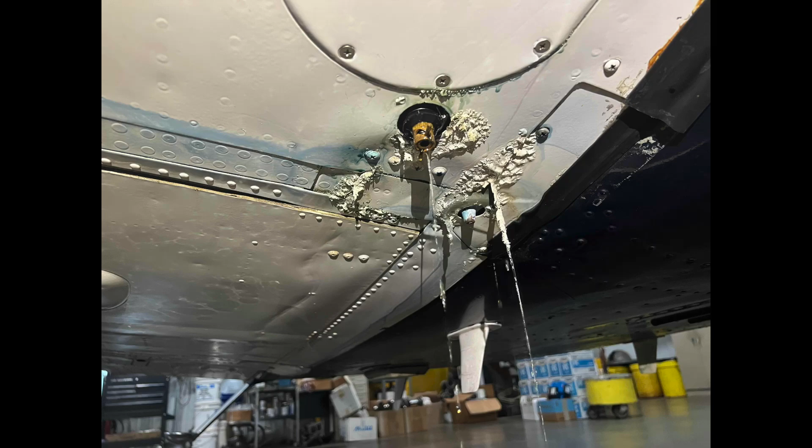In this video, I'll talk about the CEH lawsuit and the recent ruling back in May. I'll discuss an airport commission presentation where both George Brawley and myself were present to give our perspectives on experiences of users with G100UL. I'll update you on some affected aircraft that have now returned back to service, and I'll introduce a new aircraft, the Beech Baron 58, that's recently had issues. I'll dive deeper into O-rings and swelling testing and present the results of that. And I'm going to look at the materials compatibility topic in a broader scale, looking at some historical resources, and also diving into the Piston Engine Aviation Fuels Initiative, i.e. the PAFI program, and how it differs from the STC pathway. And lastly, I'll close with the FAA's recent statement on grant assurances for federally obligated airports.

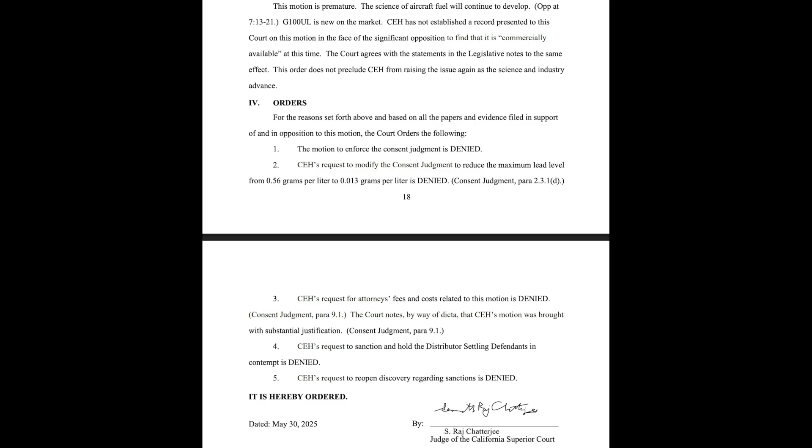So let's dive in. To start, the Center for Environmental Health's lawsuit that essentially sought to ban the sale of 100 low lead in California was ruled upon back in May. The judge took a deep look at this and came up with what I think is a reasonable ruling, basically stating this motion is premature and that there is no currently available high-octane unleaded avgas that is commercially available. In the order, the judge did deny all of CEH's motions, but he did leave the possibility for them to reopen this case as the fuel science evolves.

On June 3rd, George Brawley and myself were asked to present to the Santa Clara County Airports Commission, which governs the Reed Hillview Airport. We both presented on our unique perspectives of G100UL and users' experiences in adopting this new unleaded fuel. The public was invited to speak, both in person and online, and several users of G100UL highlighted their negative experiences with the fuel.

As you can see here on the Airports Commission agenda and docket, there are several presentations and many items submitted to the docket. I've linked this down below, where you can also find the audio recording of the evening's talks.

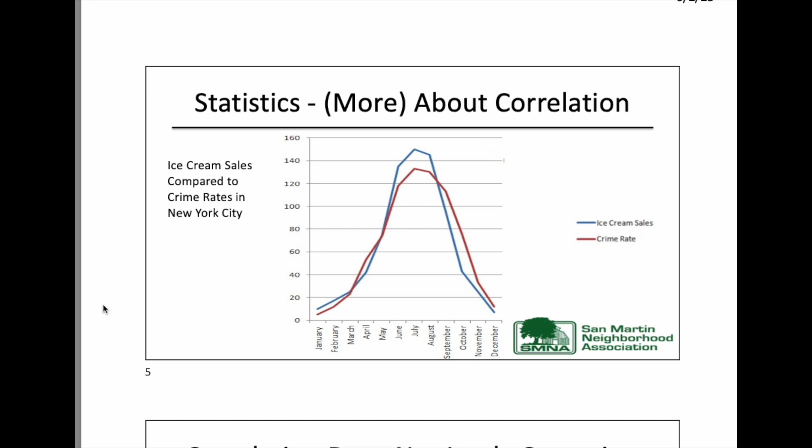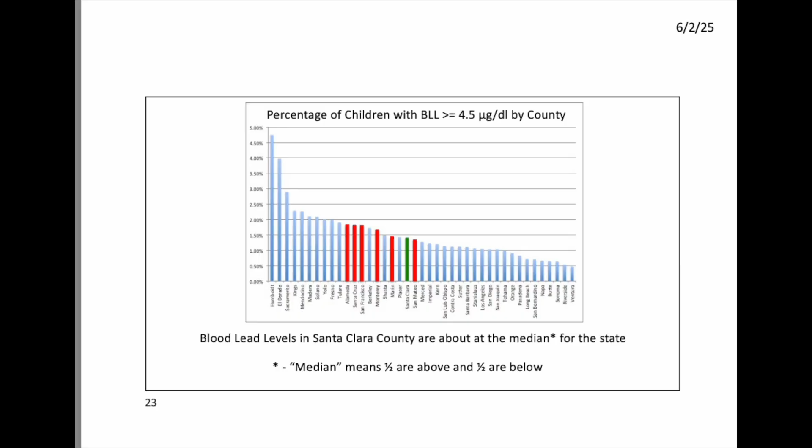One of the more notable presentations that followed the fuel discussion was done by Stephen McHenry and Doug Rice, which dug into the lead studies and blood lead levels of children around the airport and in the entire Bay Area. The presentation is very well put together and based on factual data. It's listed as item 6 in the Airport Commission meeting.

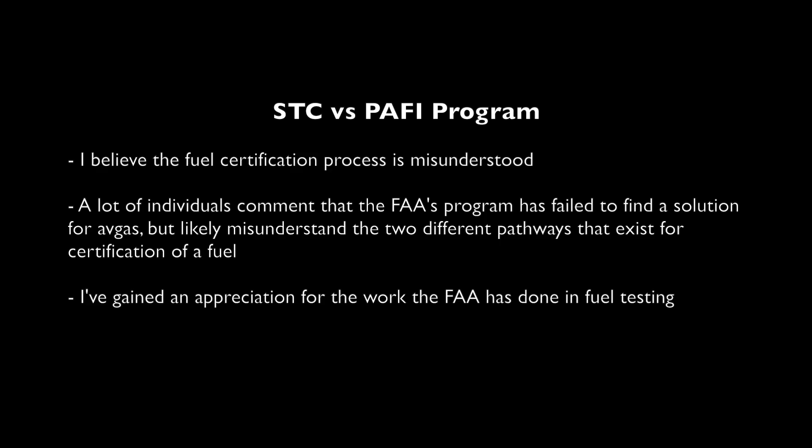The STC versus PAFI program is likely misunderstood, and a lot of individuals comment that the FAA has failed to find a solution for avgas, but likely misunderstand the two different pathways that exist for certification of a fuel. I think it's important to understand these differences between the pathways, and I'll set up a little bit of it here in the beginning of the video and then circle back at the end after I discuss some materials topics.

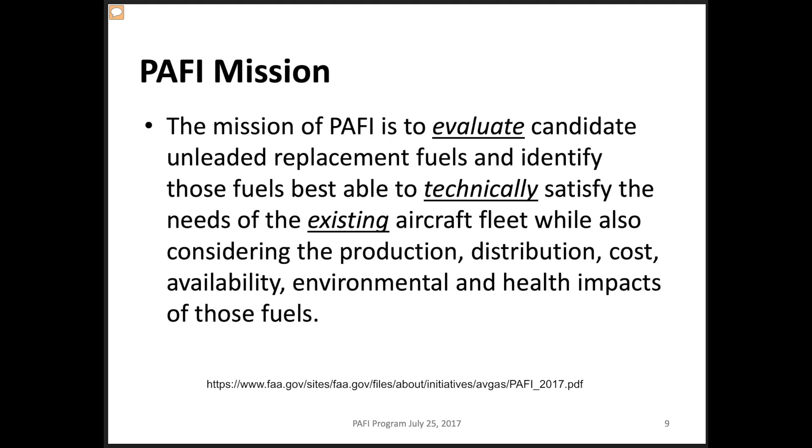There's a wealth of information on both the FAA site and the EAGLE, the Eliminate Aviation Gasoline Lead Emissions website, on this topic. One of the PAFI program updates in 2017 clearly laid out their mission, which is to evaluate candidate unleaded replacement fuels and identify those fuels best able to technically satisfy the needs of the existing aircraft fleet, while also considering the production, distribution, cost, availability, environmental, and health impacts of those fuels.

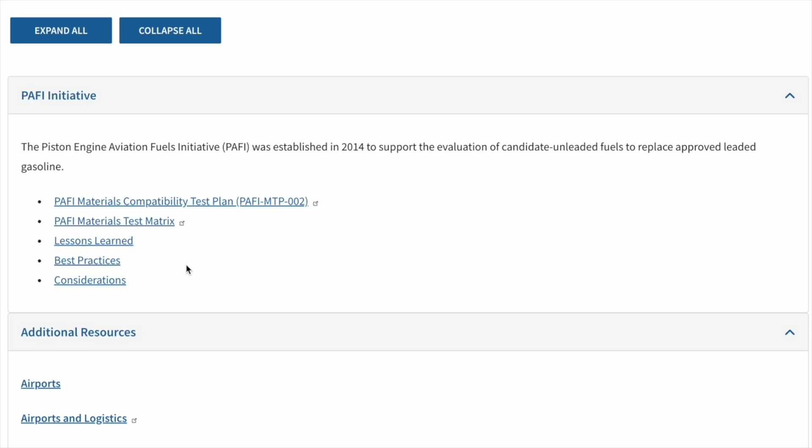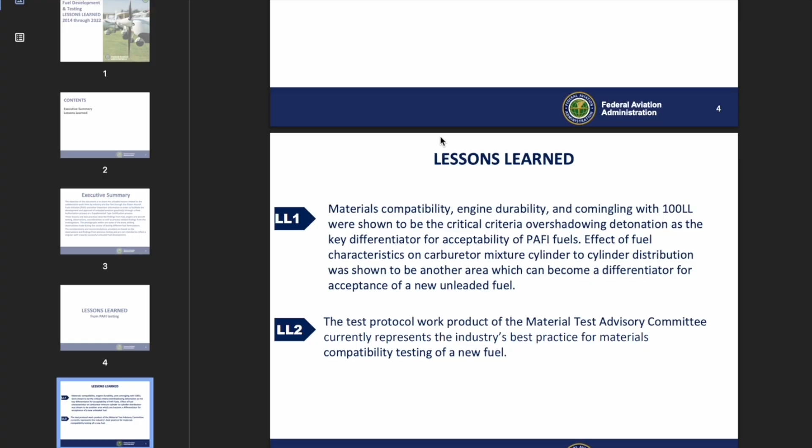At the Airport Commission meeting, I presented the first slide from the Lessons Learned document from the PAFI program, and it states that materials compatibility, engine durability, and commingling with 100 low lead were shown to be the critical criteria overshadowing detonation as a key differentiator of an unleaded fuel. I think that's an extremely important statement, especially given the experience of many users of G100UL at Reed Hillview and other local airports that have had adverse effects. Because detonation doesn't matter if your aircraft's grounded due to airworthiness issues, leaks, and seal problems.

Building off the first lesson, the second lesson discusses test protocols and materials test advisory committees setting up best practices for materials compatibility testing of a new fuel.

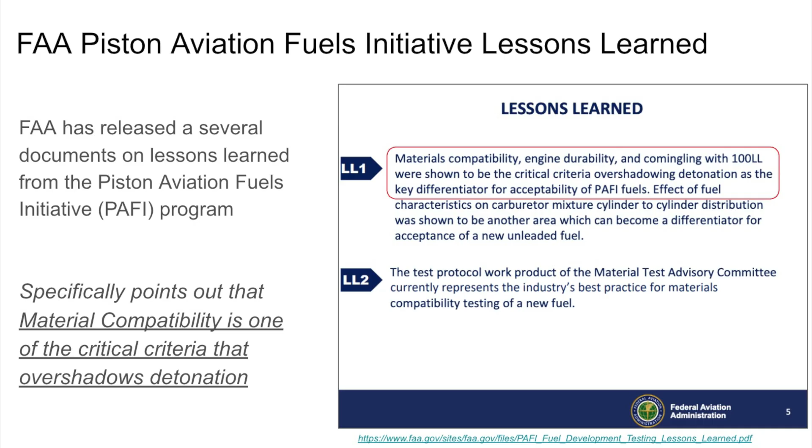The past 6 months and series of videos have taught me that materials compatibility testing is more important than I ever thought. And to further emphasize this, it seems that GAMI is learning this lesson. If one were to purchase the STC today, there now is a disclaimer on the STC checkout page. And reading the wording in the disclaimer, it does seem to indicate that they're finally admitting some of the issues in the field may be related to usage of their fuel, and that the testing I've done to validate that is essentially valid.

Let's take a look at how fuels are approved under the certification process. There are two distinct methods for the approval of a fuel. The first is the PAFI program through the Fleet Authorization pathway. The second is the STC pathway. And there's differences between the two.

For the STC method, the applicant and the FAA agree upon a test plan between each other in order to certificate the fuel against Part 23 standards. In the Fleet Authorization pathway, the fuel applicant submits the fuel to the FAA's PAFI initiative for testing. It goes through a rigorous set of standardized tests for each fuel that's applied upon, and then the results are presented as pass or fail.

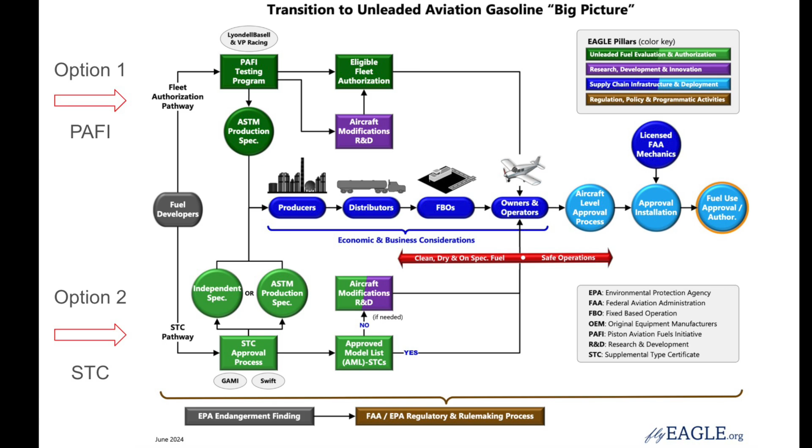This, I think, is where the difference is in the current fuels in the market. The STC method may not have as much rigor as the PAFI program on materials compatibility. And when I talk about rigor, I'm referring to the process by which a specification for a fuel is made. The STC pathway allows for an independent specification or an ASTM production specification.

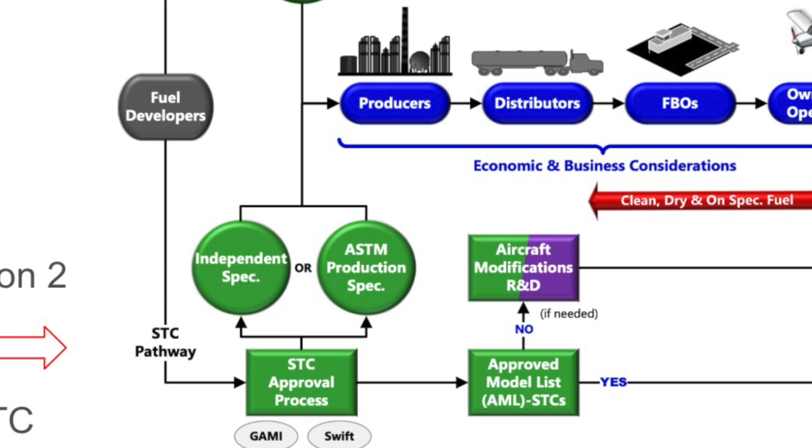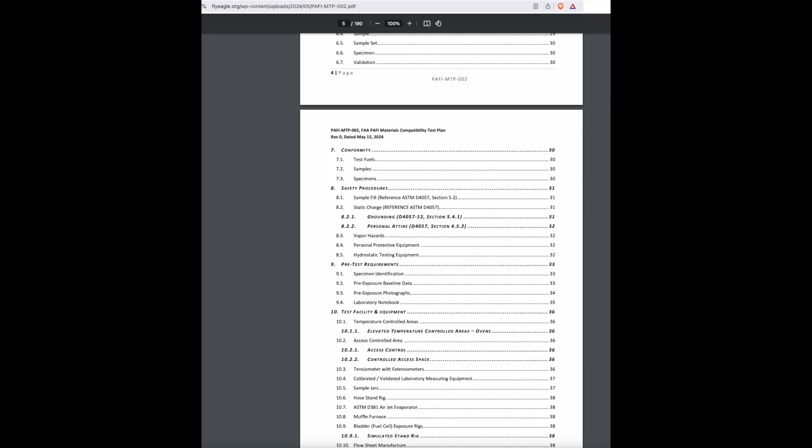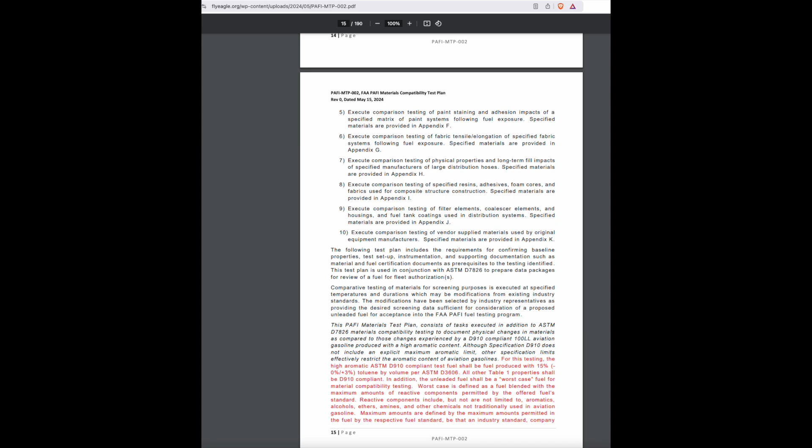An independent spec may not have the rigor that consensus-based standards like an ASTM production spec has, where it is peer-reviewed by industry. And as I've alluded to before, the PAFI initiative has a very comprehensive materials compatibility test plan, one that every candidate fuel is tested against. Since GAMI has not revealed their materials compatibility test plan, it's unclear what actually they tested the fuel against.

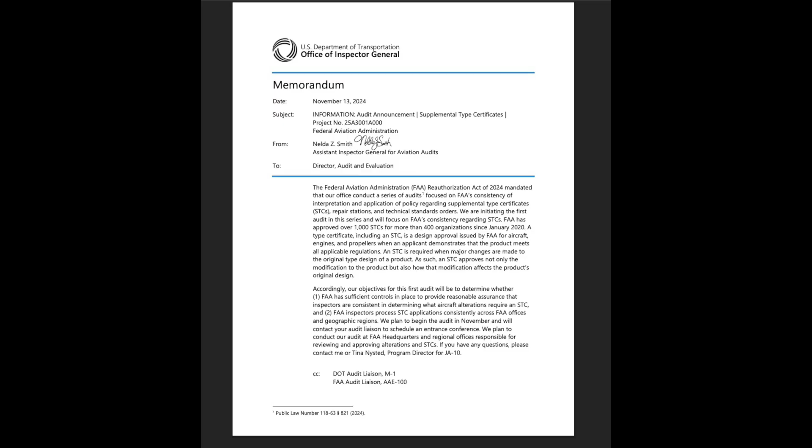The DOT did put out a memo last November talking about how they're going to audit the STC process to ensure that it's universally applied across all certification offices. Later in the video, I'm going to dig more into the lessons learned that's been presented by the FAA's Piston Engine Aviation Fuels Initiative. I think there's some important stuff in their documents.

Let me pivot to some aircraft updates. I'll update you on the Cirrus that had major leaks on the wing, a PA-32 which has had leaks and now a fuel pump issue, and a Beech Baron 58 I've recently learned about in Mississippi.

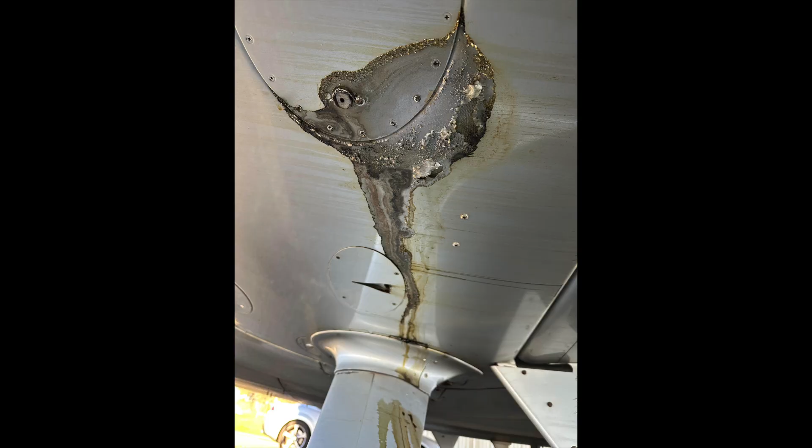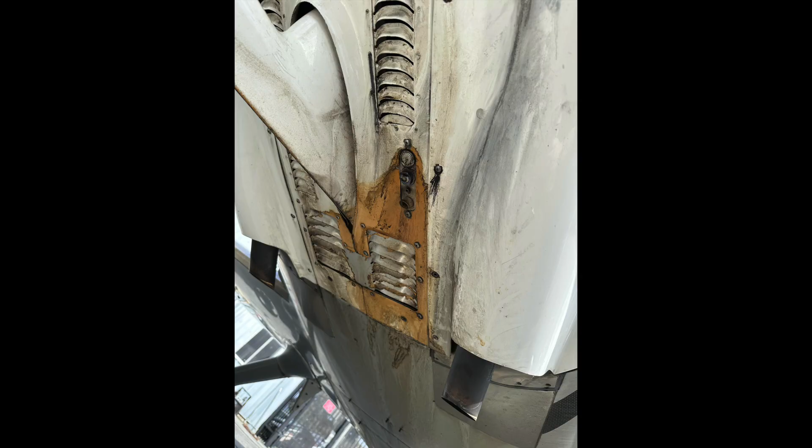The Cirrus SR-22 that I reported on back in February has finally been repaired and is now back at its home base at Reid-Hillview after being down for some 5+ months. The owner is excited and happy to have the aircraft back after this extended downtime, which included repairs to both wing tank sealant and multiple areas of paint on the aircraft, as you can see here.

One of the aircraft I've reported on previously is a PA-32 at Reid-Hillview. The aircraft ran about 40 hours of flight time on G100UL, utilizing 325 gallons of the fuel. The engine was overhauled in 2017 and has less than 400 hours since overhaul. There's been multiple trips to the maintenance shop, suspected fuel injector clogging, and essentially all the fuel sender gaskets have leaked, damaging paint on multiple areas of the wing.

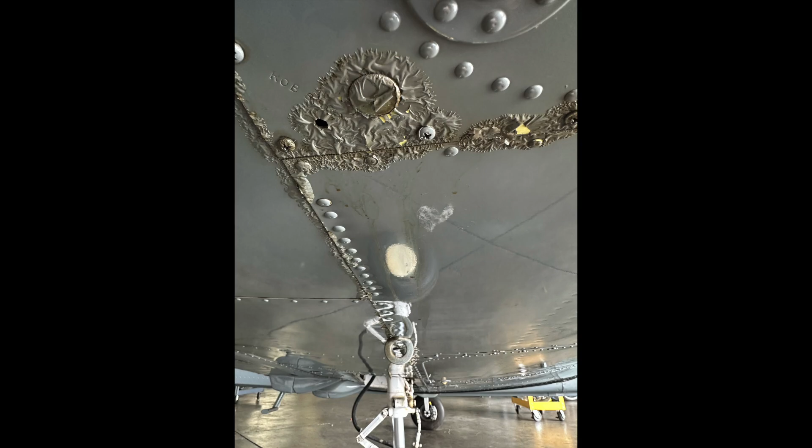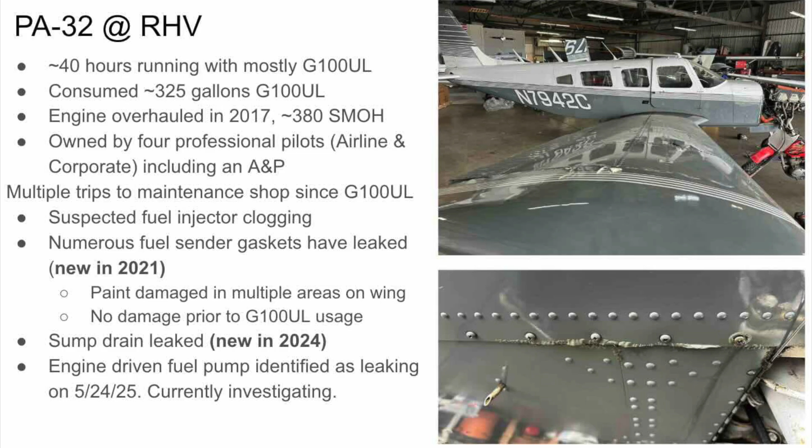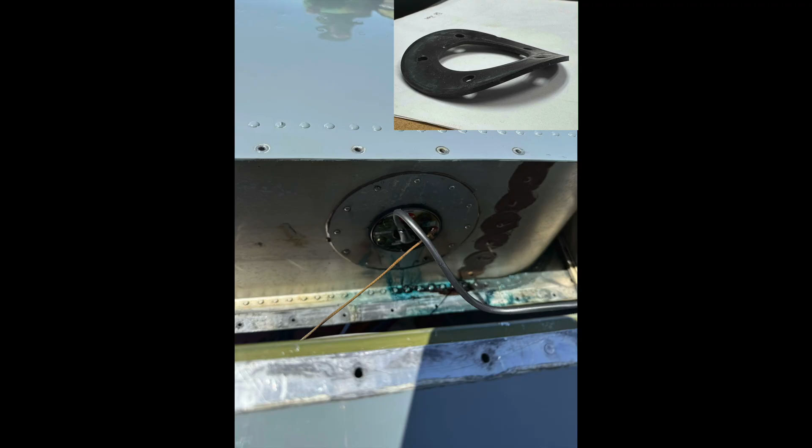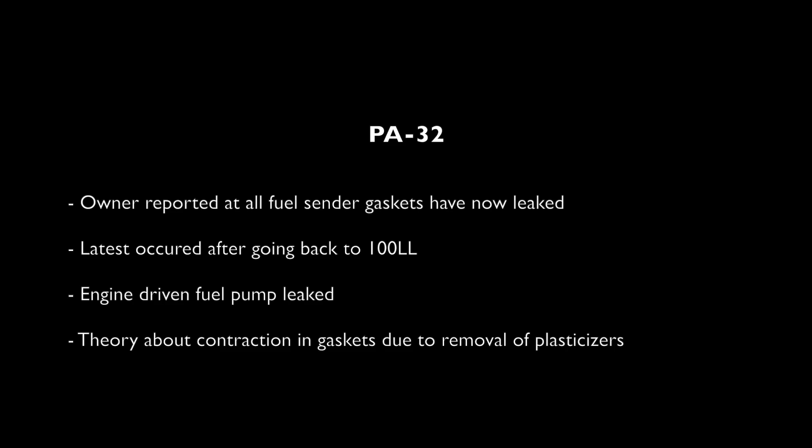It's important to note that these fuel sender gaskets were installed new with avionics work done in 2021, so they're not that old. The other item to highlight is that after switching back to 100 low lead is when the latest fuel sender gasket leak occurred, along with the engine-driven fuel pump leaking and having to be replaced. I'm going to touch on this later in the video, but this aircraft highlights one of my theories about the removal of plasticizers in rubber compounds with G100UL and the ongoing materials compatibility topic.

My understanding is that G100UL can be purchased from a total of 4 airports currently in the United States: 2 in California, 1 in Mississippi, and while not reported here, a smaller FBO in Texas. Thus, usage of the fuel has been limited, and the majority of issues have been reported in California, where likely the most fuel has been sold.

I was recently made aware of an aircraft in Mississippi that had utilized G100UL. It's a Beech Baron 58 that experienced leaks and paint degradation after relatively short-term usage of the fuel.

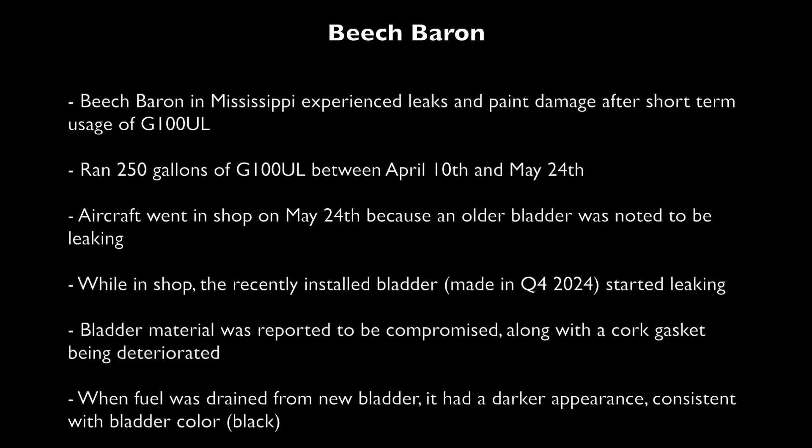Running about 250 gallons of fuel between April 10th and May 24th, the aircraft went into the shop on May 24th because an older bladder was noted to be leaking. While in the shop, the recently installed bladder, manufactured in late 2024, started leaking. The bladder material was reported to be compromised, along with the cork gasket being deteriorated.

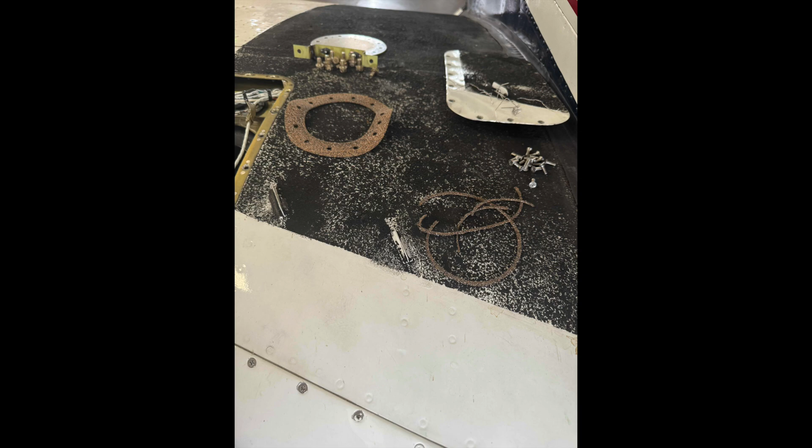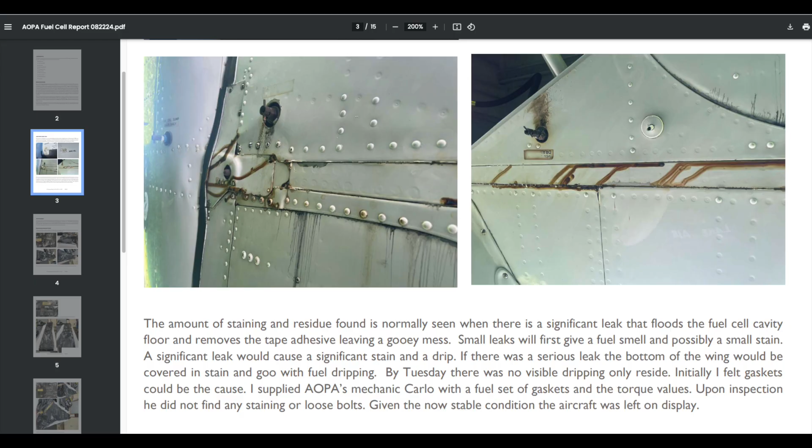When fuel was drained from the new bladder, it was reported to have a darker appearance consistent with the bladder color, black. Revisiting my earlier video on the AOPA Baron and the issues noted at AirVenture 2024, the damage on this BE-58 in Mississippi looks very similar, where fuel followed the spar to the lowest point near the jack pad. This adds another data point to Beech Barons using this fuel, and whether the AOPA Baron and this Mississippi Baron have had the same issues will be told with time.

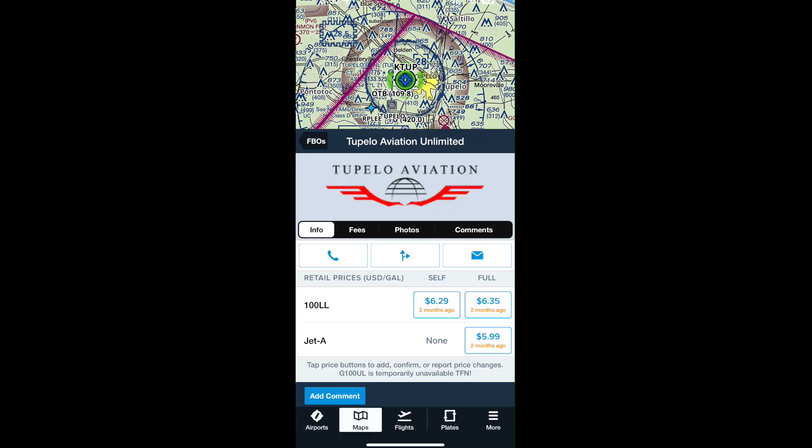The Baron fueled up at Tupelo, Mississippi, and the FBO currently has a notification out that G100UL is temporarily unavailable until further notice. Someone who inquired with the FBO noted they were told the fuel truck is out of service, and they're currently investigating why.

Questions have been raised about the O-rings I used in video number 5 with the Cessna 421 fuel selector. I want to highlight an important point of context: there is no parts catalog, IPC, or manual available for this fuel selector. I measured the O-rings that came out of it and compared best design practices from several O-ring handbooks on sizing, assuming proper material compatibility with fluid and swell less than 10% for a dynamic application.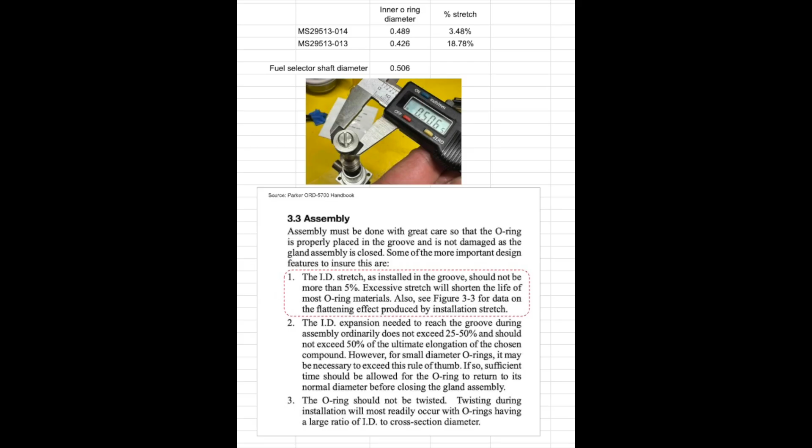-014 O-rings best match the dimensions of the removed O-rings and shaft selector interface without introducing excessive stretch when installed, i.e. less than 5%. I've initiated a longer-term test to look at the -013 O-rings in situ, but I don't have any results at this time to report.

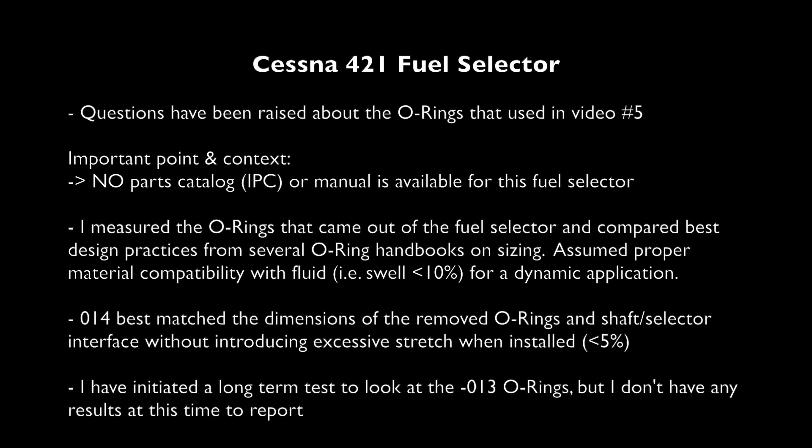Let me share some preliminary data on what O-rings do when exposed to different fuels. In the video posted of GAMI's O-ring testing by Scott Perdue of Flywire, O-rings were pre-swelled at elevated temperatures and, as best as I can tell, rammed into the fuel selector for testing, not performed in situ. To clarify, all of my tests have been with fuel from the pump.

Nothing is sauced or added to bring the fuel to some extreme data point or corner case. I started with unswelled O-rings that were subjected to fuel in situ, and the fuel selector was then exercised. O-rings were sourced from aviation sources.

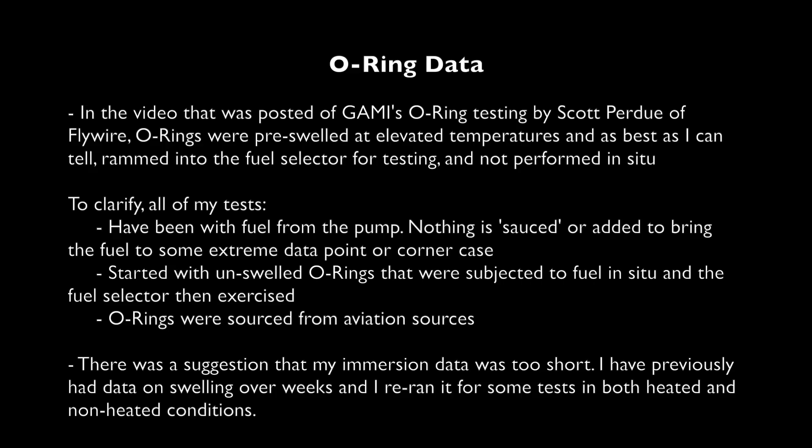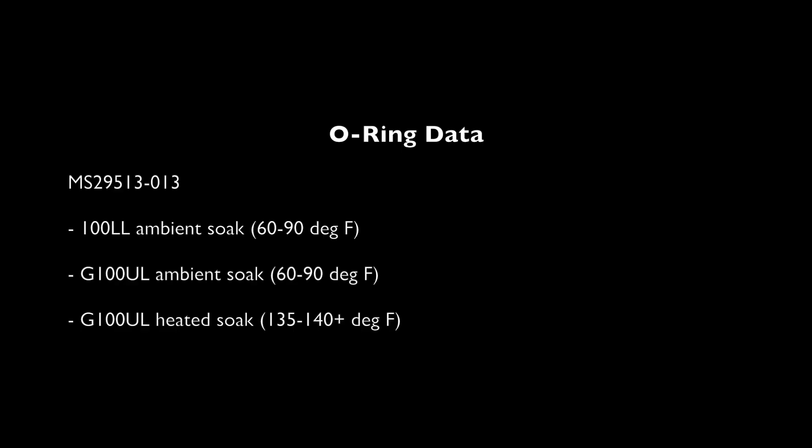There was a suggestion that my immersion data was too short. I previously had data on swelling over weeks, and I reran it for some tests in both heated and non-heated conditions. Much has been said about O-ring swelling in both ambient and heated temperatures, so I ran some tests: 100 low lead ambient soak, G100UL ambient soak, and G100UL heated to about 135 to 140 degrees F.

Here are the results of those immersion tests over about a 2-week span. 100 low lead swelled to about 10% additional volume within the first day or two, then relaxed to about 3 to 4% swell over time.

The bottom plot is a combined ambient soak between 60 and 90 F, and a heated soak of G100UL immersed O-rings up to about 140 degrees F over 2 weeks. They eventually settled to about the same swell level, gaining 40% additional volume over time. The only notable difference is that the ambient soak seemed to reach peak swell slightly faster than the heated soak.

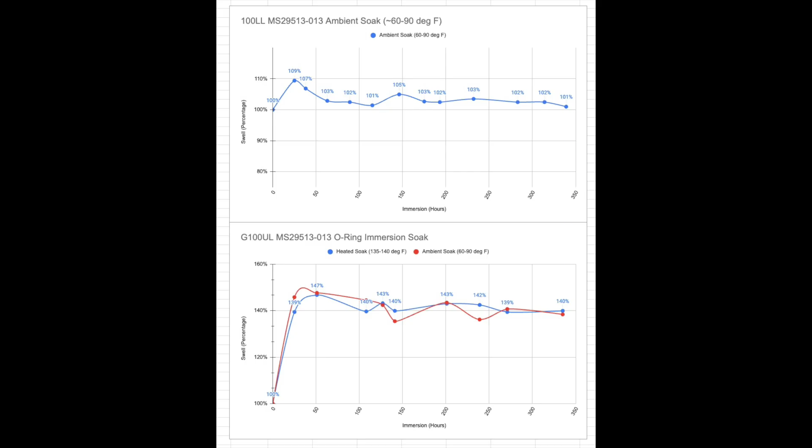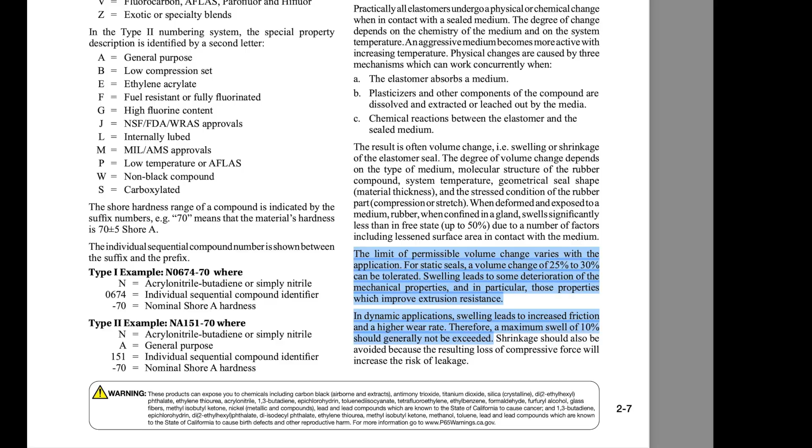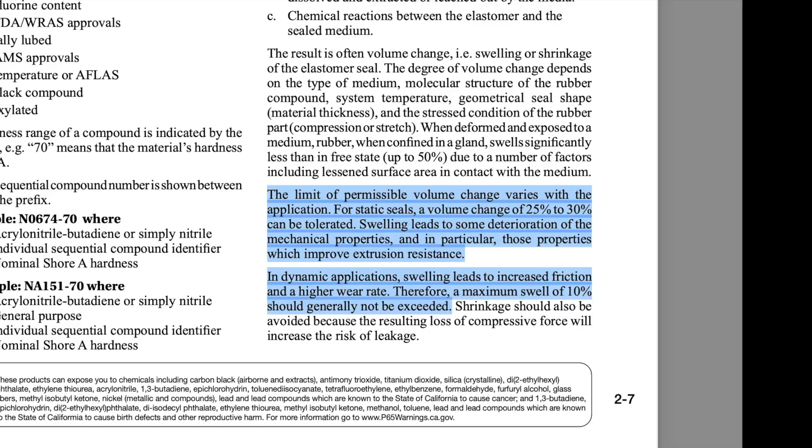There have been comments online suggesting that calculating volume change by percentage for an O-ring is just an academic exercise. I actually disagree, because as noted here, the volume change means there's a chemical reaction going on, and not all swell is good. This means any deterioration of the mechanical properties of an O-ring will take time to fully materialize.

A lot of questions about materials replacement and who can perform work have been raised, especially related to mechanic privileges. There is no publicly available manual or illustrated parts catalog for the 421's fuel selector. Can a mechanic legally field-overhaul one? Can they replace the O-rings with, quote, 'modern materials'?

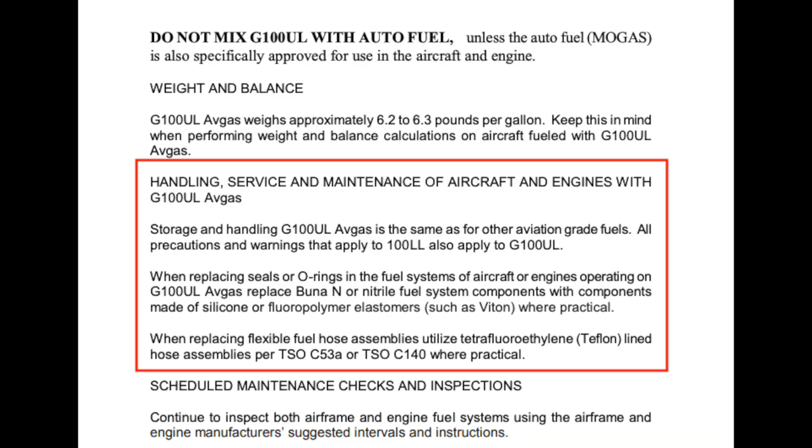Where is the approved data and cross-references for those materials? And while GAMI's ICA mentions replacement of materials while performing maintenance where practical, I don't believe this statement is a blanket authorization to just go replace materials with your liking, especially without specific manufacturer or aftermarket FAA PMA approval for those components, with cross-references and specific designations.

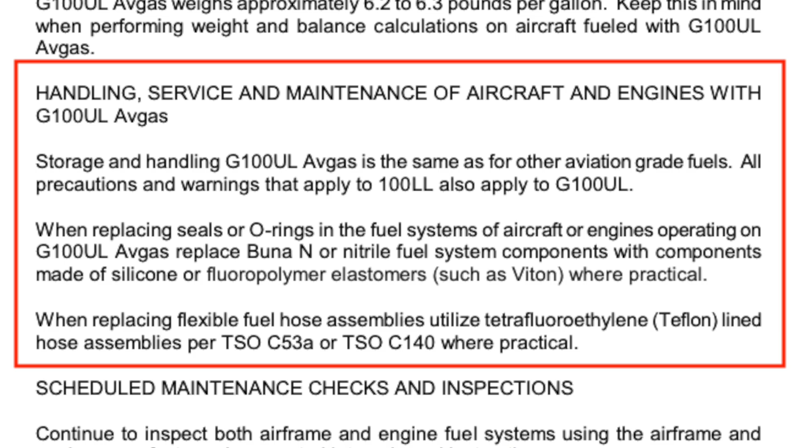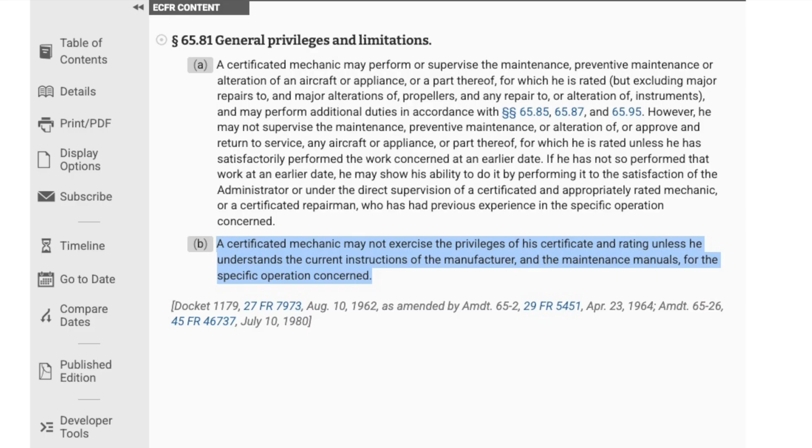And since there's no manual or IPC for the 421 fuel selector, let's look at mechanic privileges. Under 14 CFR 65.81, it says a certificated mechanic may not exercise the privileges of his certificate and rating unless he understands the current instructions of the manufacturer and the maintenance manuals for the specific operation concerned. Given that statement, I think it's clear that unless manuals and procedures were available for the fuel selector design to the mechanic, that the unit is not field serviceable.

In addition, there are things like pressure tests and breakout forces for actuation of the fuel selector that would need to be performed, and there's no manual for that. And if new materials were put in place, one would need to test the fuel selector across the wide temperature ranges that the aircraft like a 421 would be subjected to, from the hot Arizona sun on the ramp to colder temperatures at 30,000 feet.

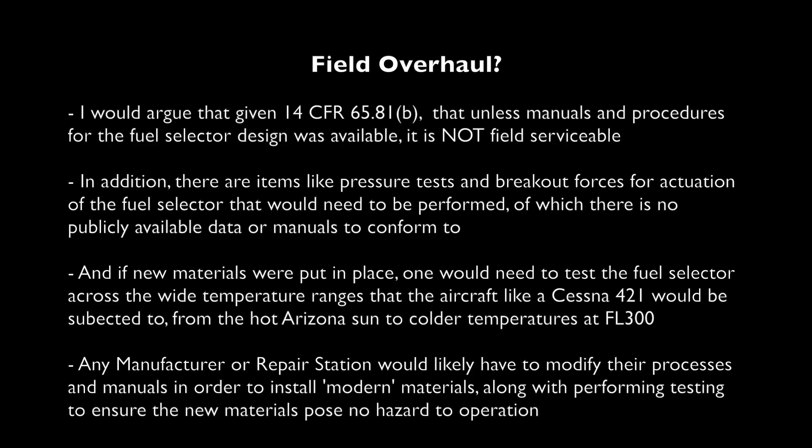And lastly, any manufacturer or repair station would have to modify their processes and manuals in order to install modern materials, along with performing testing to ensure the new materials pose no hazard to operation. Undoubtedly, the discussion on any new fuel being introduced will raise material compatibility concerns. But if those materials need to be changed, there needs to be specific approvals and the ability for a mechanic to legally replace them. Much has been said about the aromatic content of fuels and how 100 low lead can have as much as 30% of aromatics by spec.

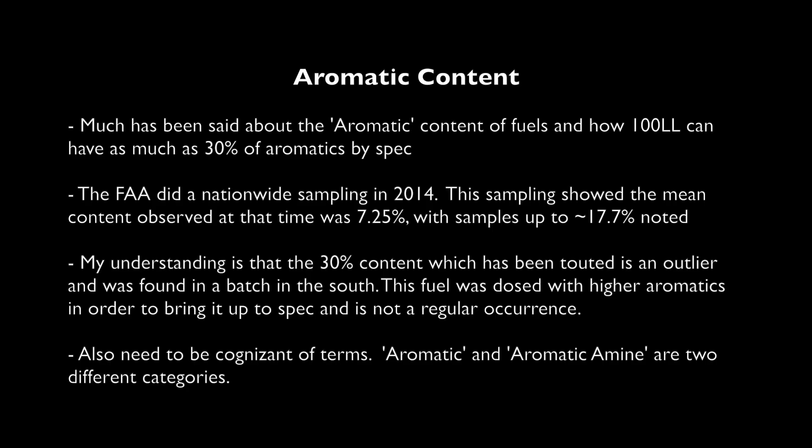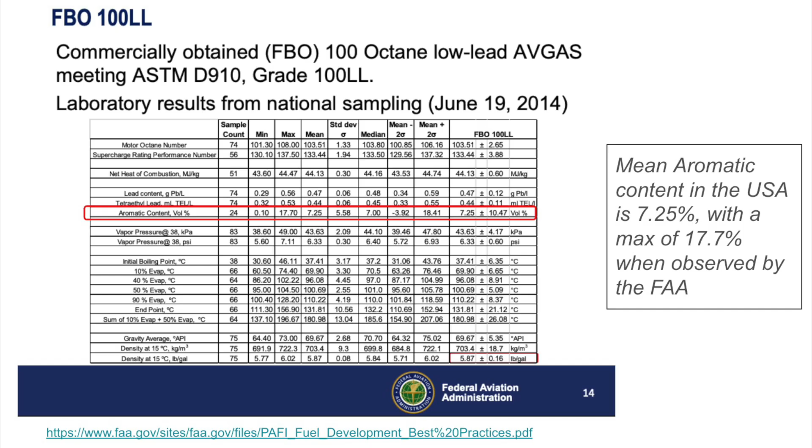The FAA did a nationwide sampling in 2014. This sampling showed the mean content observed at that time was around 7.25%, with samples up to about 17.7% noted. My understanding is that the 30% content, which has been touted, is an outlier and was found in a batch in the South. This fuel was dosed with higher aromatics in order to bring it up to spec and is not a regular occurrence. We also need to be cognizant of terms.

Aromatic and aromatic amine are actually two different components of G100UL. While xylene in G100UL could be correlated with toluene, the M-toluidine in G100UL is different as an aromatic amine.

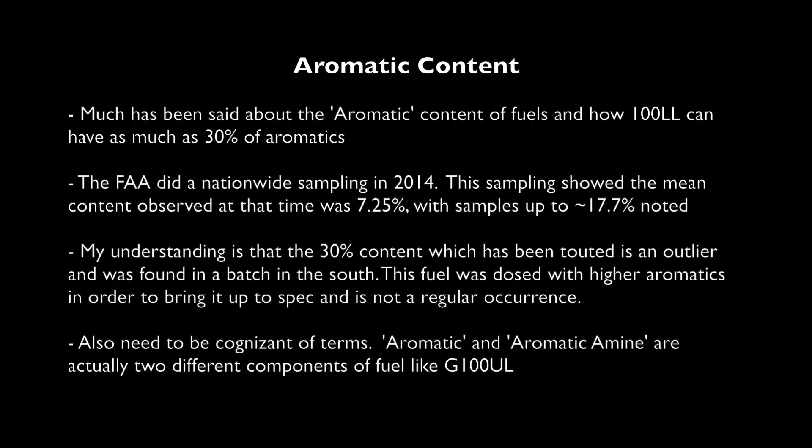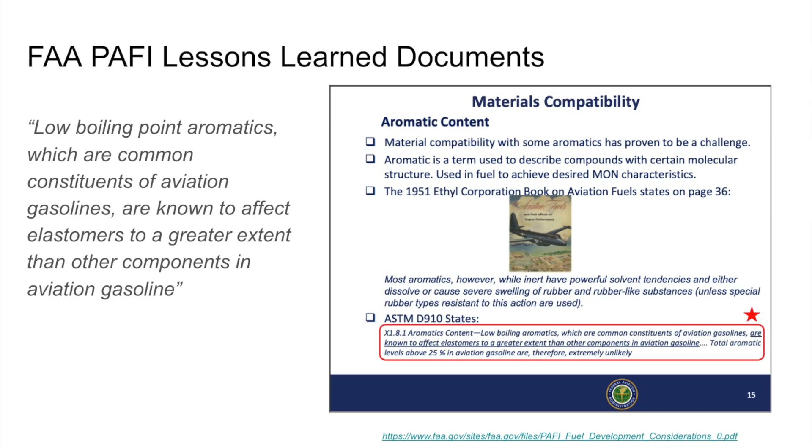The main challenge is replacing lead, which is essentially a metal element, with some form of chemical to get the octane booster. The article states that UL-100E had completed the first phase of ASTM D7826 materials compatibility testing, and that lack of information on materials testing of G100UL was a stumbling block at that time. Also quoted was that materials testing is critical because that's what may have caused many of the previous PAFI fuels to fail.

Since ASTM D7826 was mentioned, let's have a quick look at that. It's the standard industry guide for evaluation of aviation gasolines. It includes material compatibility guidelines. And the main question with G100UL has been what tests and methods were performed on the fuel since they didn't get an ASTM specification. And even though they've gone down the STC route, Swift has still secured ASTM specifications for their fuel and performed laboratory testing of materials compatibility.

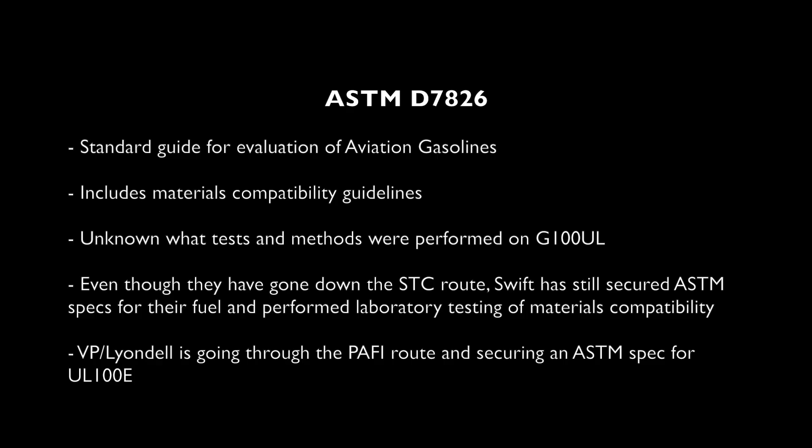Lastly, VP Lyondell is going through the PAFI route, and that requires securing an ASTM spec for UL-100E. Eagle's March 2025 update highlighted an important fact that an ASTM spec is found in just about every fuel available for purchase today, even outside of aviation.

Fuel recipes for aviation have to balance many factors, but they all conform to ASTM D910 for leaded avgas. This includes octane, anti-knock additives, vapor pressure, boiling point, freezing point, cold starting requirements, distillation curves, and a lot more.

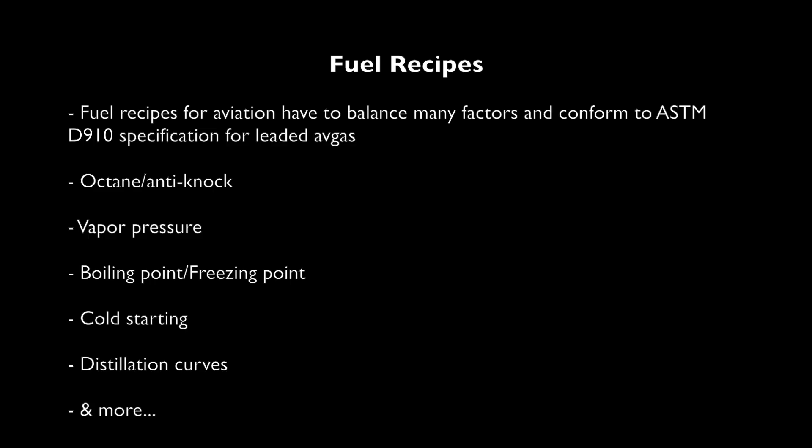While fuel recipes have to balance all those other factors, octane enhancement is a challenge for replacing 100 low lead. My understanding is octane boosters can be generalized into four categories: metals, aromatics, oxygenates, and aromatic amines.

The removal of lead as an octane enhancer has provided a challenge for materials compatibility. Since lead typically does not affect rubber and elastomers like chemicals do, replacing lead with items like aromatics, oxygenates, or aromatic amines may introduce materials compatibility issues to varying extents.

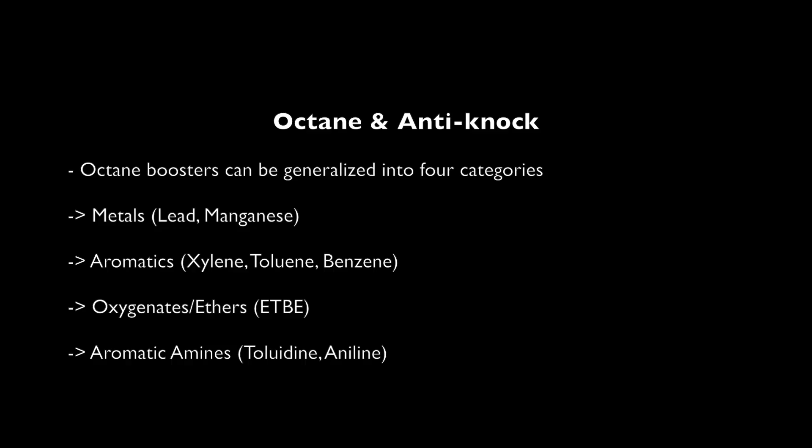Let me expand on this now with what I've uncovered with some publicly available materials related to previous fuel candidates. My research over the last 6 months has dug into some of the previous PAFI fuels. There were 2 candidate fuels that went through the PAFI program up to about 2018, over a 4 to 5 year span.

That included an offering by Swift and Shell. The FAA hasn't released any details on either fuel's composition, but one can infer from patents and some online publications what the fuels were likely composed of. Then, a review of the PAFI lessons learned documents adds additional clues.

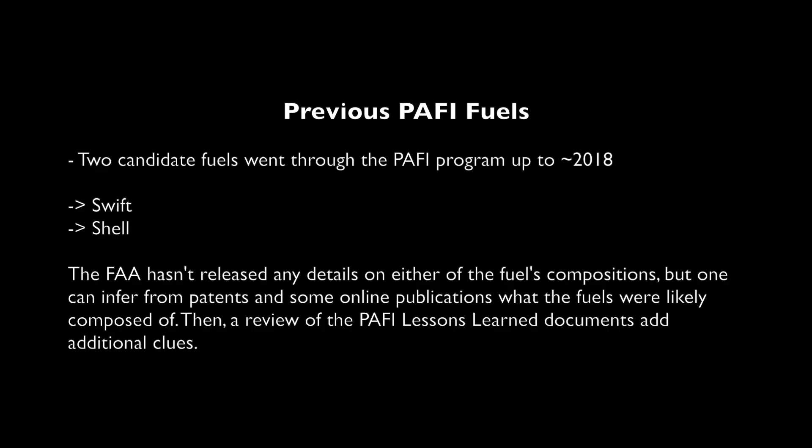An update from the PAFI program in 2018 adds additional clues to digest related to the fuel compositions. A publicly available article in Aviation Consumer dug into Shell's Unleaded Avgas update a couple years ago, and it notes that they explained using aromatic compounds instead of lead as an octane enhancer.

The article then goes on to compare Shell and GAMI's fuel development efforts, noting that both are using an aviation alkylate along with high aromatic content in order to boost the octane. On the other hand, Swift's fuel was noted to be a totally different composition and would be heavier by about a pound per gallon than Avgas.

It's important for context to point out that both Shell and Swift did not continue with the PAFI program with the particular fuel compositions presented here.

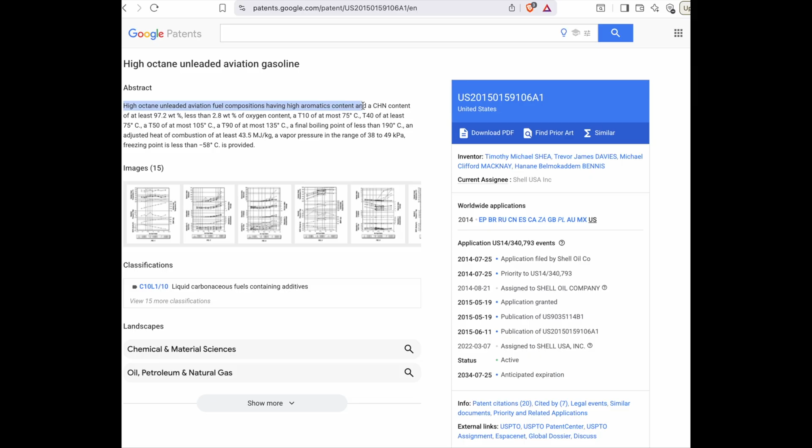I was able to locate some patents related to Shell's fuel offerings for Avgas, and they talk about a high octane unleaded aviation fuel having high aromatics, as noted here. In the patent, they actually talk about the difficulties in replacing lead and getting octane enhancement in an unleaded avgas.

This includes not impacting the flight range, vapor pressure, temperature profile, and freeze points that meet the aircraft engine startup requirements and continuous operation at high altitude.

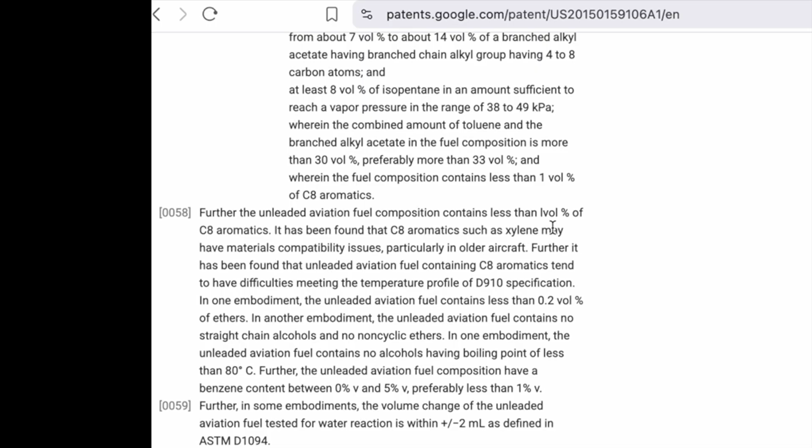Like most patents, they show various embodiments of their invention, including using toluene and other components to achieve this new aviation avgas. But what was most striking to me was their comment about C8 aromatics, specifically pointing out that aromatics such as xylene may have materials compatibility issues, particularly in older aircraft.

While it appears that Shell learned some lessons with xylene and opted to use toluene in their candidate fuel, let's look at GAMI's STC, which points out they have between 20 and 40% by volume xylene in their fuel.

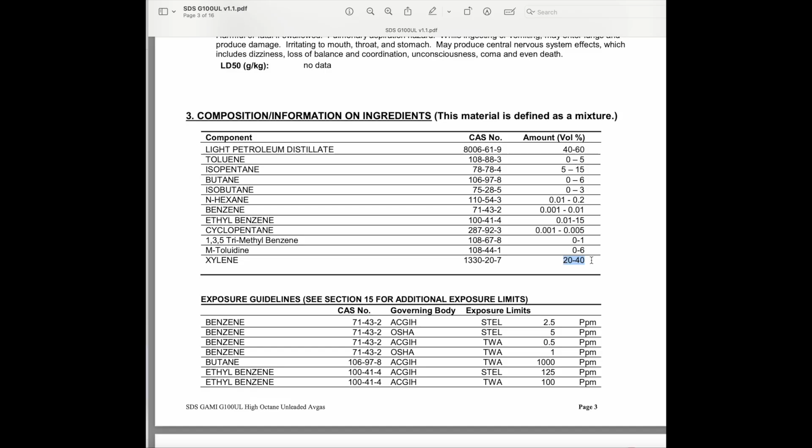What does GAMI's new STC disclaimer say? It says the age increases the risk of fuel seepage and potential paint damage with G100UL, even if no issues are observed with 100 low lead. Sounds familiar. To me, it seems like there should be some limitations on materials in GAMI's ICA.

Many of you might recall my reporting on the Cessna 421 at Reed Hillview that has had numerous panels with yellowing and paint degradation. It looks awfully similar to one of the PAFI candidate fuels from 2018.

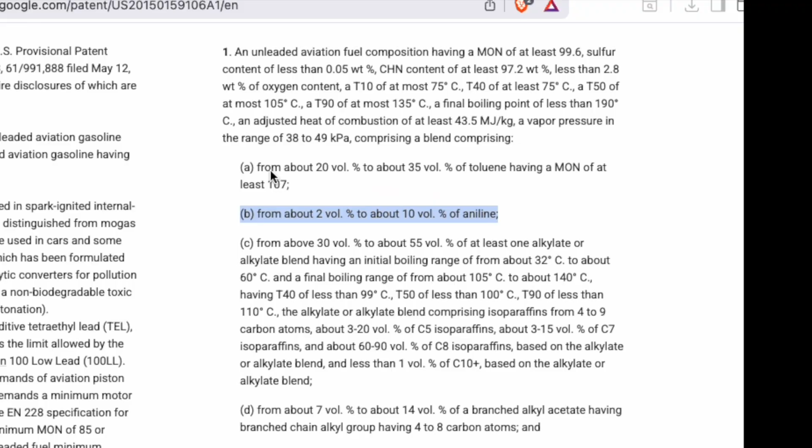The yellow color of paint staining on aircraft that have utilized G100UL appears to be tied to a component called M-toluidine. But what's in the Shell fuel? It contains between 2% and 10% aniline, which is another aromatic amine. It acts as a good octane booster, yet also yellows with exposure to light and air.

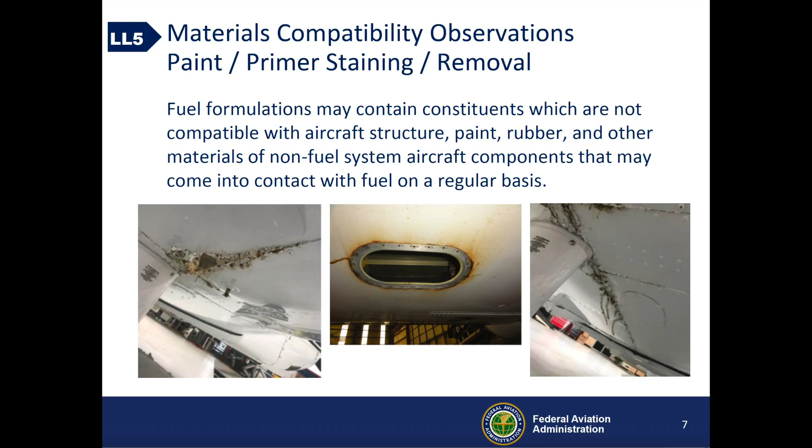So putting this all together, I'm theorizing that the center photo here is actually from Shell's candidate fuel in 2018, which had an aromatic amine called aniline. And the Cessna 421 at Reed Hillview has had similar yellowing and paint damage due to an aromatic amine.

So I think it would be wise to heed the advice and wisdom from the fuel development and testing lessons learned from the PAFI program.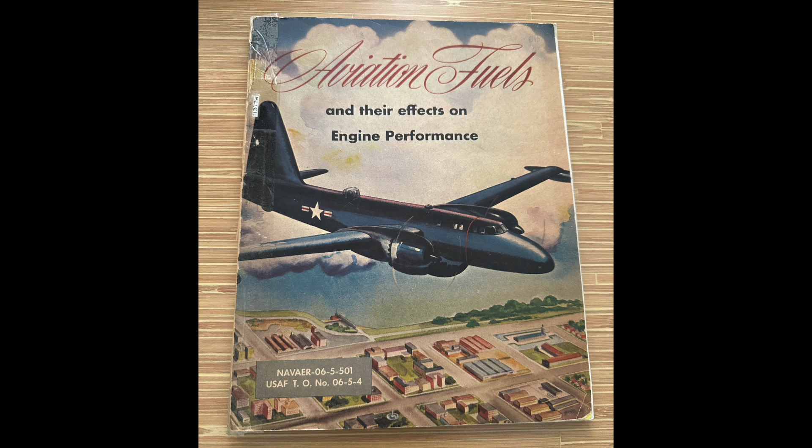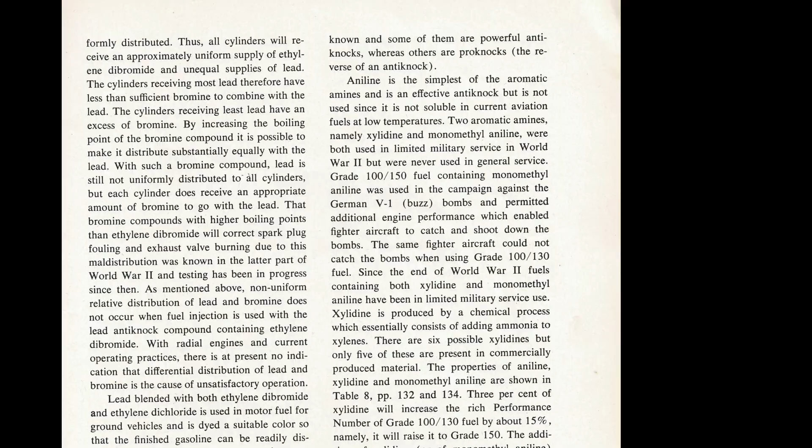One of the other fascinating reads in this fuel endeavor is a book from the Ethyl Corporation titled Aviation Fuels and Their Effects on Engine Performance. As always with wartime efforts, the government spends a significant amount of money and there's a lot of research done in short time frames, and I think we all can benefit from what was learned with fuels back in the 1950s. This book goes into many of the chemicals tested in wartime engine development, including aniline and aromatic amines. But more importantly, it talks about the effects of fuel on rubber, and how many of these chemicals are solvents, and powerful ones at minimum.

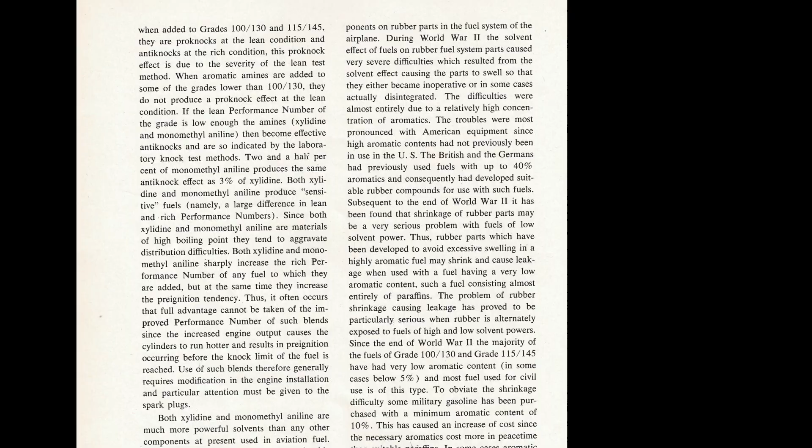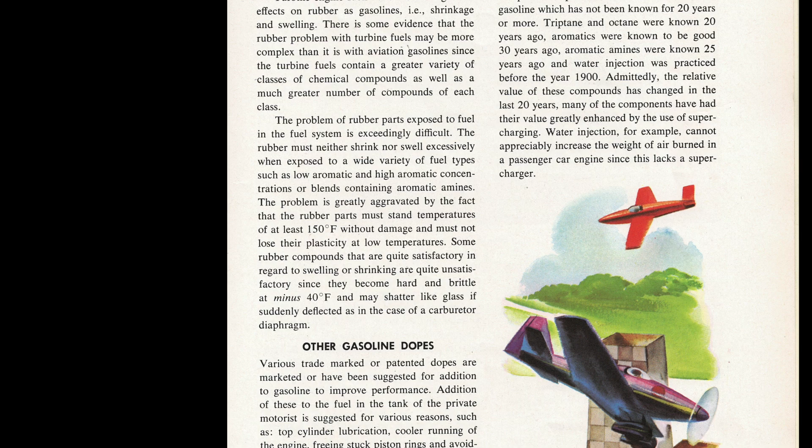It talks about the solvent effects of fuels on rubber systems, which was either significant swelling or disintegration. There's also mention about alternating between low and high aromatic fuels and the effects that has on rubber, and that it might actually remove some of the plasticizer and shrink the component.

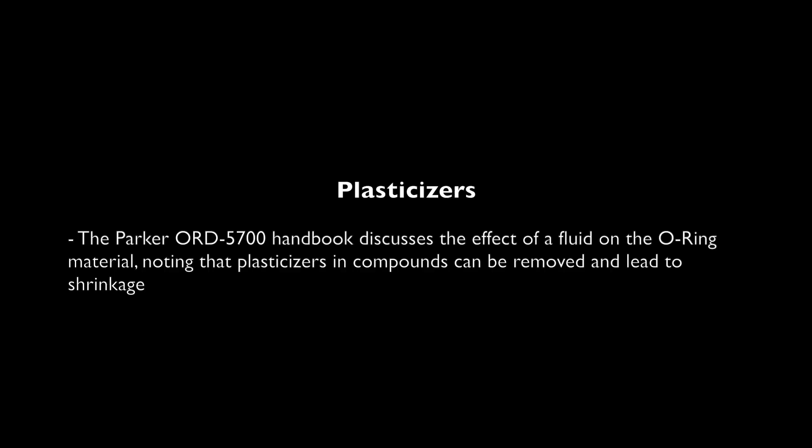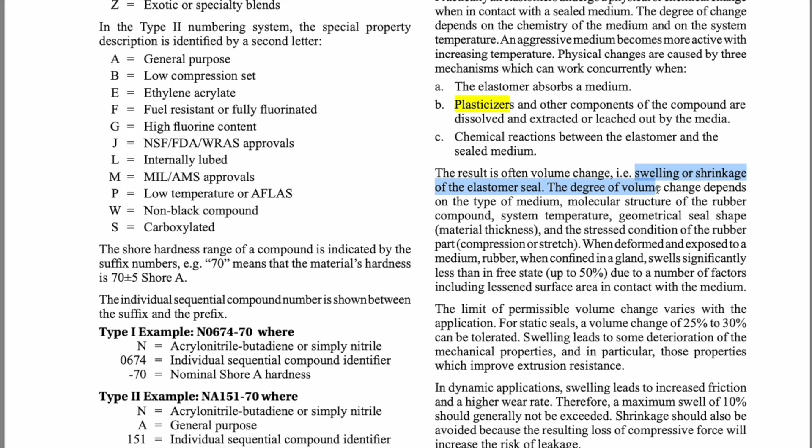I've referenced Parker's O-ring handbook previously, and it discusses the effect of a fluid on the O-ring material, noting that the plasticizer or components of the compound can be extracted or leached out by the media when it's absorbed in a fluid. I mention this because one of my theories, especially in the PA32, is that when alternating between different types of fuel, i.e. G100UL or 100 low lead, the owner of that aircraft has had leaks in the fuel sender gaskets.

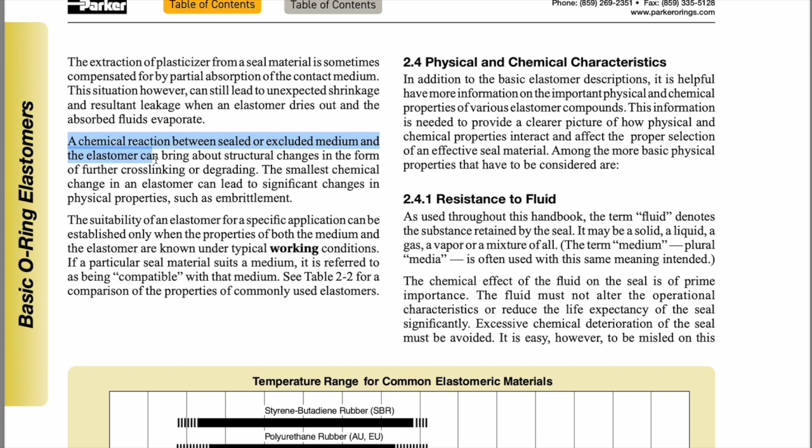And any chemical reaction by the elastomer absorbing the medium can result in a degrade in the physical properties, such as embrittlement. And here it cautions about shrinkage due to plasticizer extraction causing seals to shrink. It's certainly a consideration that needs to be looked at for long-term usage of fuels.

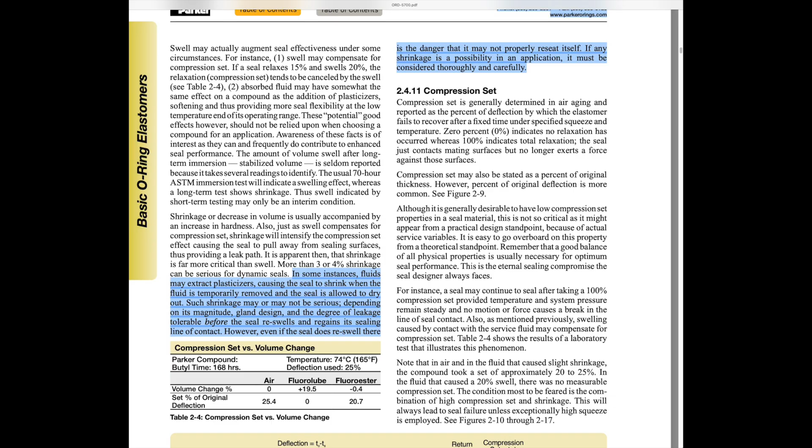As noted earlier, especially in the PA32 case and rubber gaskets, I think this may be one of the things we're seeing in materials compatibility in the field.

And don't get me wrong here, the development of a high-octane avgas is an extremely tough problem that many smart and talented chemists and engineers at major oil companies have worked on over the years. G100UL's fuel rollout hasn't been hiccup-free, and it appears that other companies may have learned these same lessons and opted not to go down similar paths.

I highly encourage individuals to take a look at the documents in the PAFI program regarding lessons learned and development practices that were released based on previous candidate fuels.

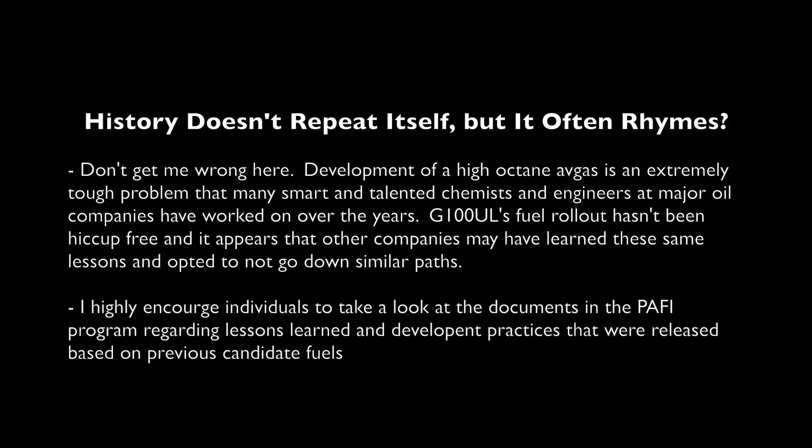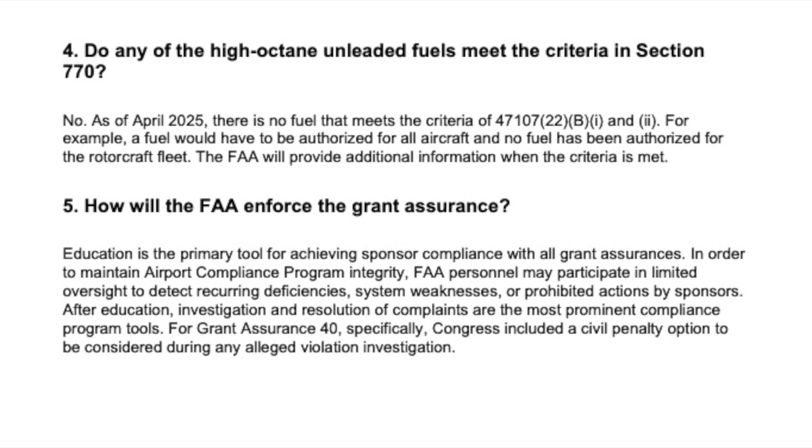The FAA recently issued guidance on grant assurances in relation to 100 low lead and whether an airport sponsor may prevent or discontinue the sale of 100 low lead. It was stated clearly that an airport sponsor may not take action or fail to take action that would directly or indirectly prohibit or restrict access by airport users to 100 low lead. It was also noted that no unleaded fuel currently meets the criteria in Section 770 and is authorized for all aircraft.

A few thoughts as I close out here. Individuals are obviously going to have to weigh the pros and cons of each fuel in their situation. It appears that materials compatibility issues are now being acknowledged by GAMI by way of their STC disclaimer. Materials replacement and mechanic privileges have to be carefully considered.

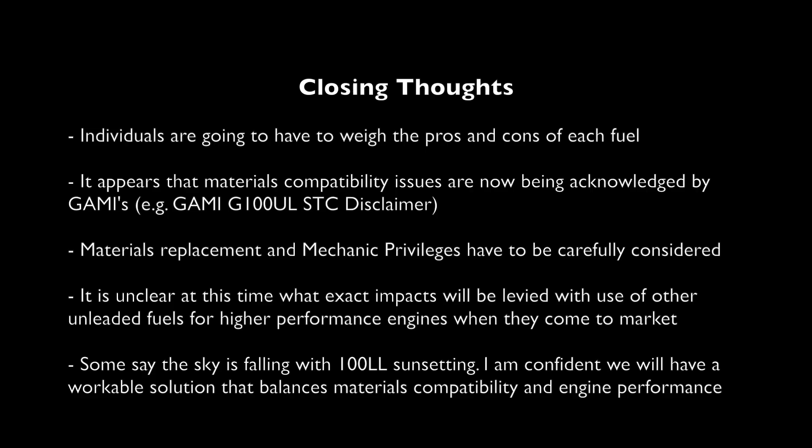It is unclear at this time what exact impacts will be levied with the use of other unleaded fuels for higher performance engines when they come to market. Some might say the sky is falling with 100 low lead sunsetting, but I'm confident we'll have a workable solution that balances materials compatibility and engine performance.

And some personal long-term thoughts. Based on the material compatibility issues, I'm personally coming to terms with the fact that a long-term solution may be adjustments to our aircraft and engines, along with the development and implementation of new engine technologies.

Don't get me wrong, I really like my current aircraft. I know people who fly older warbirds, but they are based on legacy designs, and we all know there are many barriers to development and certification of new engines, namely money. But I think for the GA fleet, there's definitely a need to use more modern technology that may not require a high octane fuel.